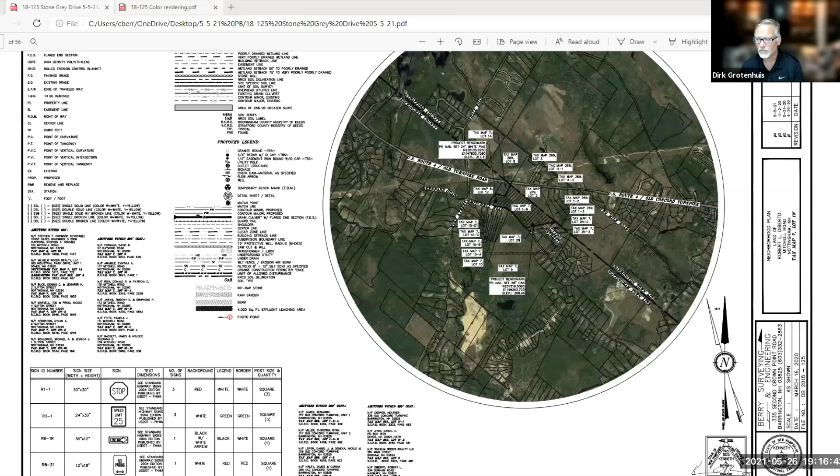Okay, great. Mr. Chair, members of the board, Christopher Berry with Berry Surveying and Engineering. Just a brief overview of the timeline of the project.

Last September, or a little bit prior to that, there was some discussion about needing a variance to cross through some jurisdictional wetland areas. That was ratified by the board, and we asked that our application be tabled until such time as we received a variance and came back. We're basically ready to come back to the board now. What we didn't want to do is continue to a frustrating no end until we were really ready to come back with a formal resubmission to you. So that process has taken place.

We have received the variance to cross through the two wetland areas that we previously had discussed with the board, approximately 6,000 square feet of disturbance. After we received those variances, we took some time to really evaluate a lot of the board's comments.

Since then, I think you can see in my narrative to the board, we've made quite a bit of change, primarily to the two entrances of the project and how that affects the rest of the site and the rest of the project. We also have some updates for the Division of Historical Resources and our archaeological consultants, who've been doing some work on the site as well. It took us a bit to make the changes we thought were necessary between the time we got the variance and our submission on May 5th.

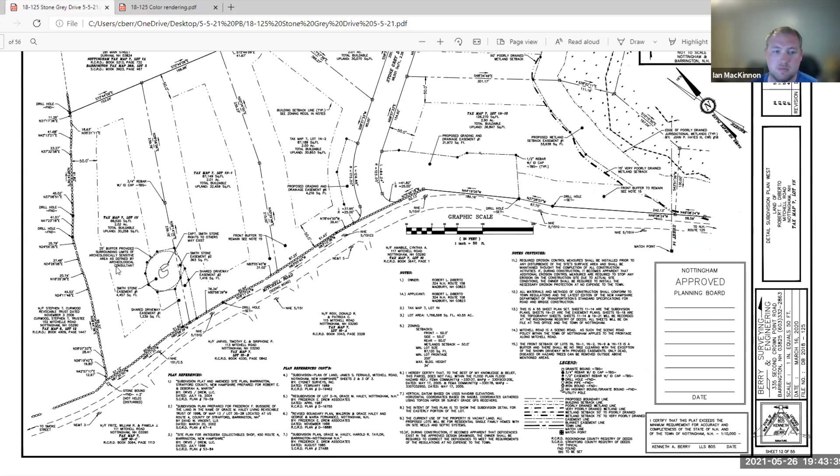The only question I had, I haven't found it in the plans yet in the notes—you mentioned there were some notes related to the monument cemetery easement. Are there restrictions on regrading within that easement? I see there's a proposed driveway close to it and a house close to it. Are there any limitations to regrading within it? I assume it needs to remain as is.

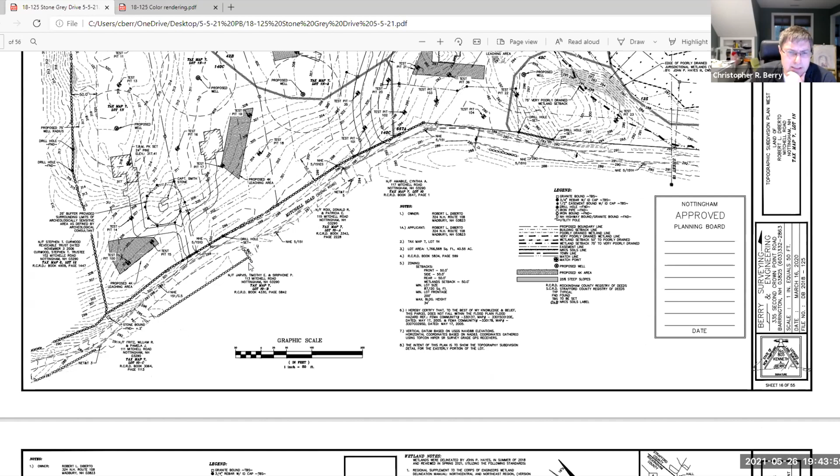Yeah, so there's no grading allowed within that easement. Okay, we do show a driveway that skirts right along the edge of that. And I believe somewhere in these plans, I required my staff to show me a profile of how that would be built.

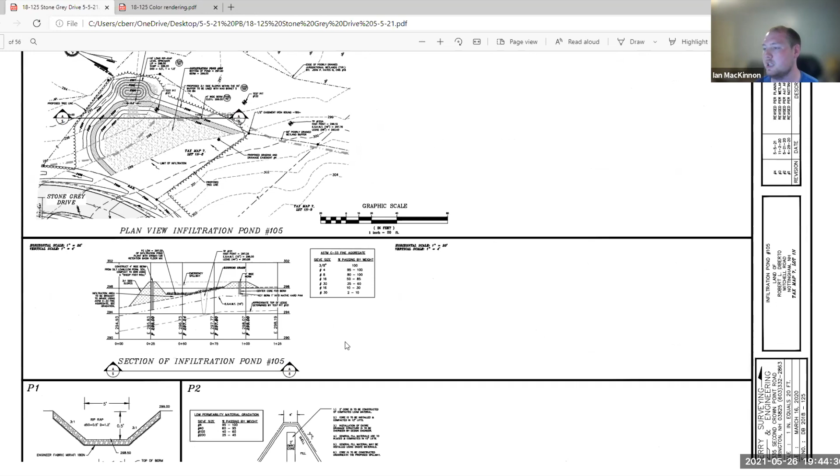Yeah, for this very conversation, you can see it here on this overview grading. I know one is provided as part of the sight distance plans, sheet 44. Yeah, I see there was a profile for that first common drive portion. If you go from there, it looks like they split off based on the contours. It looks like they should be able to avoid it, with some tweaks here and there.

They're probably not going to draw these too harsh. They'll be a little more sweeping as they're built on site, so they probably won't be so close to that easement line. But to answer your direct question, no disturbance allowed in that easement whatsoever.

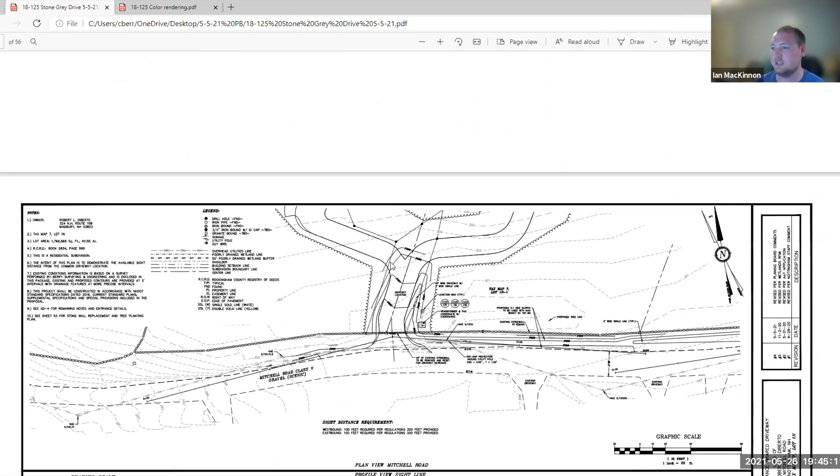Okay, good. Like I said, I think it's good. There's a noticeable improvement to the disturbance level related to the stormwater and stuff. I'm glad to see that some of the redesign helped you consolidate the ponds. Overall, it was a lot of good improvements.

Any other members with comments or questions? Yeah, it's Mr. Veal. Thank you, Mr. Berry, I think you summarized a very complex issue, a lot of detail, in a great way. I think it's clarified and alleviated a lot of our prior concerns. We appreciate you listening to the feedback we gave and incorporating it into this revised plan.

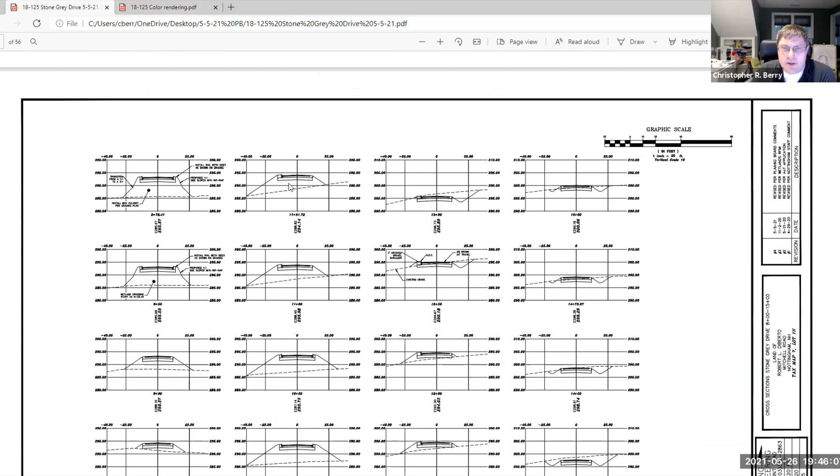One of the items I had before was proposed lot 19-13, and I think a few others had 25% and greater slopes. That amount that's not included in the lot envelope at all, correct? It is not. So all of the 30,000 square foot buildable area calculations do not include the 25% slopes or buffers.

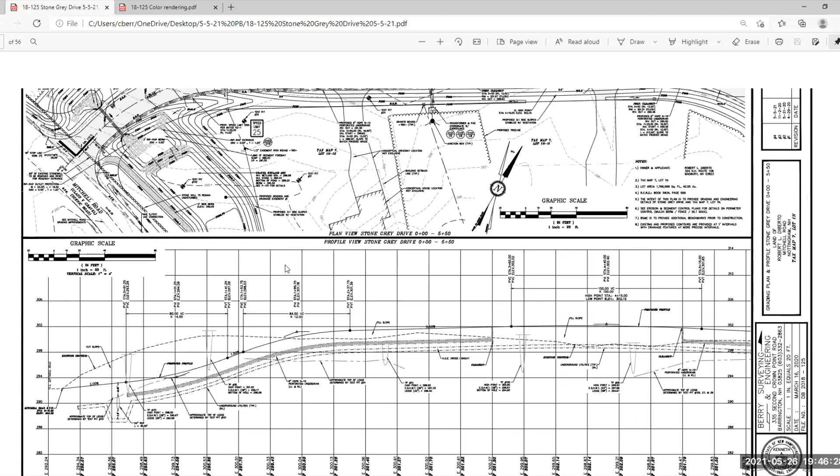Have you already gone to the Concom, being on a scenic road? That's usually one of the requirements, that you go to the Concom and they provide feedback to this board, which we either utilize or don't. Yes, we've been to the Conservation Commission on this project. Yeah, I thought so, but it's been a bit.

So, the 25-foot burial buffer, how's that? Is it delineated with any kind of visual, or is it just that you avoid it during construction? That's actually a really good point. We've geometrically determined the easement area around it and provided metes and bounds around that buffer, and we would place easement bounds with caps on them. But much like the wetland buffer we're proposing, some well-placed placards at eye height would probably be a good idea.

Okay, and there's no improvement of the burial area proposed, right? There's no fencing or anything like that being proposed, correct? There's not, no. It's not defined well enough for us to try and undertake that type of work.

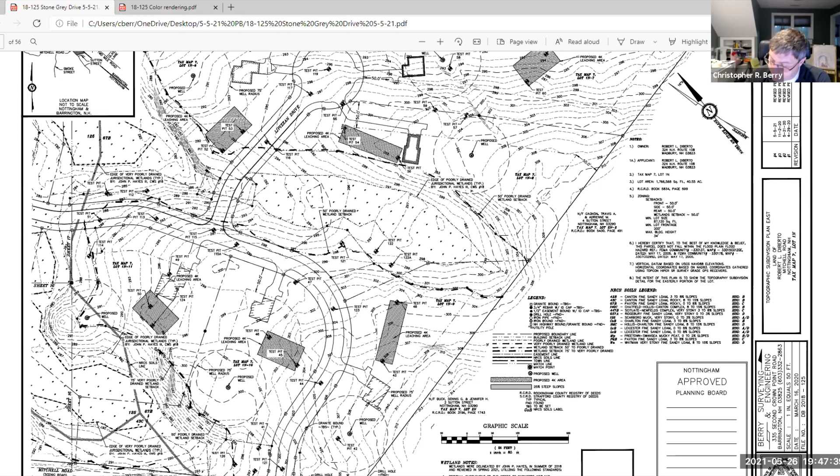I would encourage some kind of visual to help landowners and future landowners know where that is, at least for a period of time. I think that would be great. I like the idea of the wetlands buffer you mentioned. It's hard for a landowner to understand where those are, but with some kind of visual clues, that's going to be very helpful with maintaining that area and hopefully eliminating any impact to it.

The only other one I had, I guess this is more for the board, is with the grading, erosion, sediment control plan, there's one item in our subregs that says the board will not accept final calculations that have not been reviewed and approved by the town's engineer. I don't know if that's happened yet.

Well, we don't have a town engineer, and we did not have this out for consultant review. The original project was reviewed by CMA, the third-party engineer, and I think these plans have been sent to them. Joanna's nodding yes. Yes, they've been sent for review. I have not had any feedback from them yet. CMA, I can't believe I couldn't think of their name. CMA, yep, correct. Yeah, then that's valid.

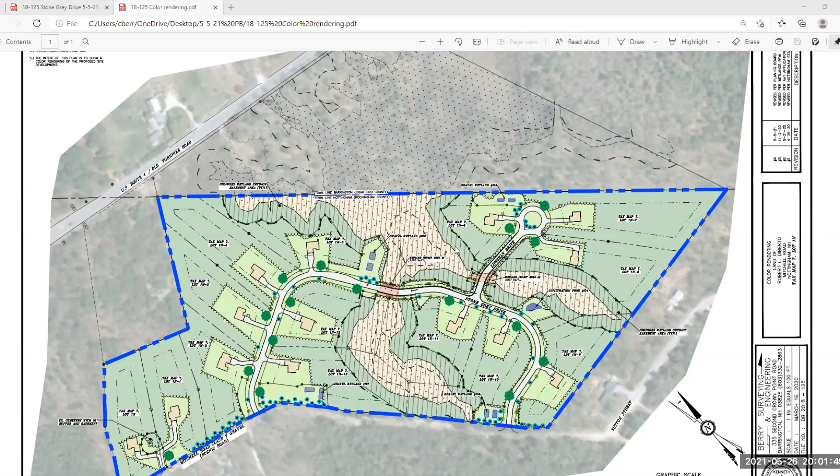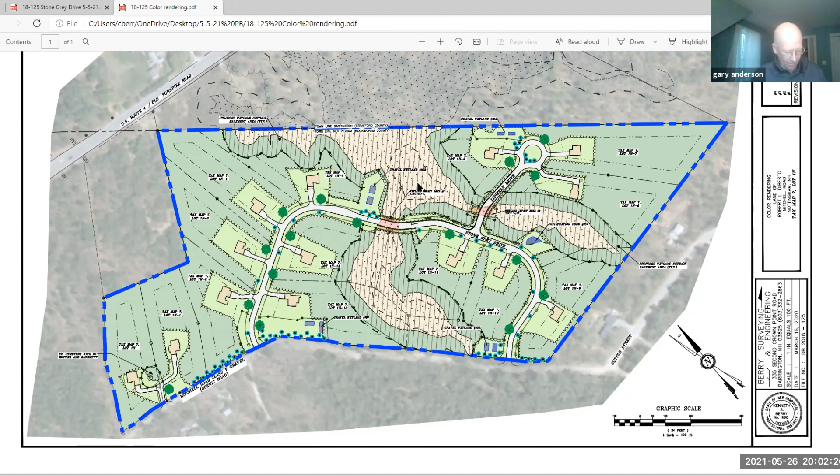Gary, you've been holding on very patiently. I have been, I just had one question. Mr. Berry, I know you've been working with the road agent on the subject of Mitchell Road. I thought I remembered that there would be grading changes in Mitchell Road, and I'm kind of not understanding the plan to see that. So my question really is how much disruption or change is actually planned to happen on Mitchell Road.

So from the entrance of Stone Grey Drive, we'll call that the northern entrance, this is really where there's a vertical face in the road cut. And so we're proposing that that be swaled, with an extension of a shoulder. So Mitchell Road would be widened by a foot or two.

And then there would be a 3-to-1 slope into a swale that's about 2 feet deep, and then a 3-to-1 back slope. That would be cut back up to the existing stone wall, and so that stone wall in that area would not be touched. Then we're proposing some landscaping, trees be planted on the back side of that stone wall.

Currently there's not a whole lot of vegetation there, and because we're taking down vegetation that's in the town's right of way, we wanted to enhance that area with some visual appeal and buffering in the future. The profile of Mitchell Road through this section, heading south from the same intersection, would be regraded and shaped, providing some cover over a proposed upgrade to an existing culvert under Mitchell Road. That area would have gravels added and the profile modified slightly.

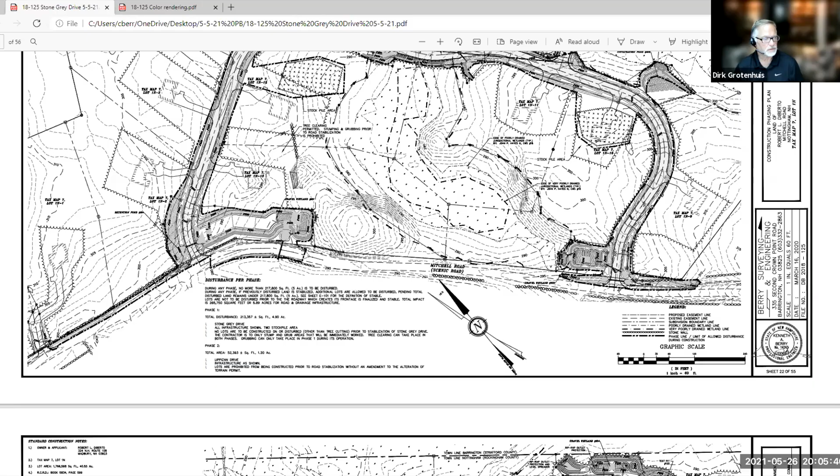Thanks, Gary. Any other board members have a question before I open it up to the public? Okay, let's go ahead and open it up to the public for any testimony. Seeing there's only a few, I will not take it in order of opposition or favor. So if anybody does have a comment, for or against this application, you can take yourself off mute and state your name, your address, and then your comment.

Anybody from the public have a comment? I have a question. Yes, go ahead. Is it Patricia? I believe your screen has frozen.

Is anybody else hearing her? No, but Patricia, if you can hear us, there's a number on the planning board page you can call in instead if your internet's having a problem. It's 301-715-8592. As I realize, if you have internet problems, you can't get to the website, so...

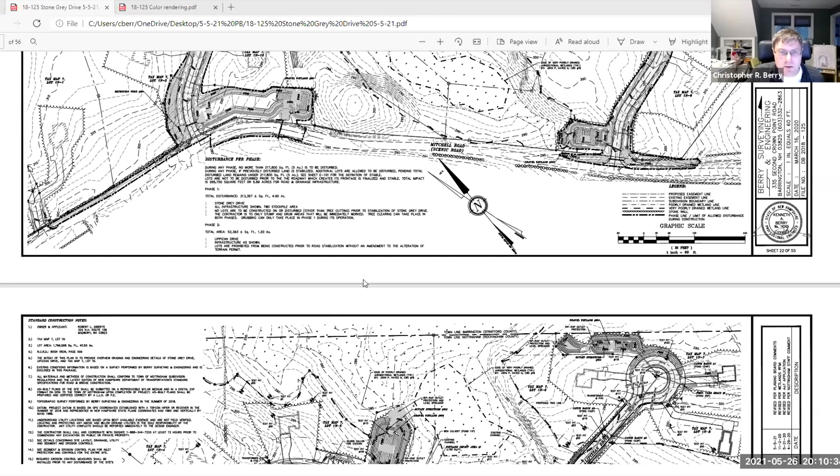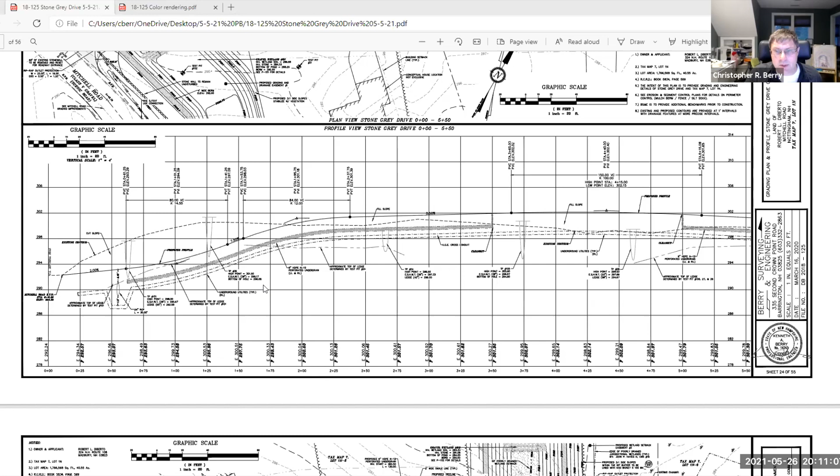Mr. Berry, could you comment about what you know about the soils there and whether there's blasting planned at the moment? There's no blasting planned at the moment. Let me just look at one profile real quick. At the entrance to Stone Grey, where it enters, there might need to be a little bit of hammering, since we are dropping that down a little bit. But as you can see, our test pits are shown here in the profile. This is the existing grade, and these are the test pits. There might need to be a little bit of hammering to get our gravels in, but no known blasting at the moment. We do have a blasting note so that if it is required in the future, they follow the fire department's rules and regulations for blasting. You would have to be notified as an abutter, and if you so chose, you would have your foundation and potentially your well monitored if blasting were to take place.

Okay, because that location is right across the street. Right, if they were going to widen the road on the corner as well. Yeah, that's what we're thinking, that the area you're taking down is potentially ledge. We've done test pits in that area, and I don't believe there's ledge. You're talking about the widening of Mitchell Road. I don't believe there's ledge in that area.

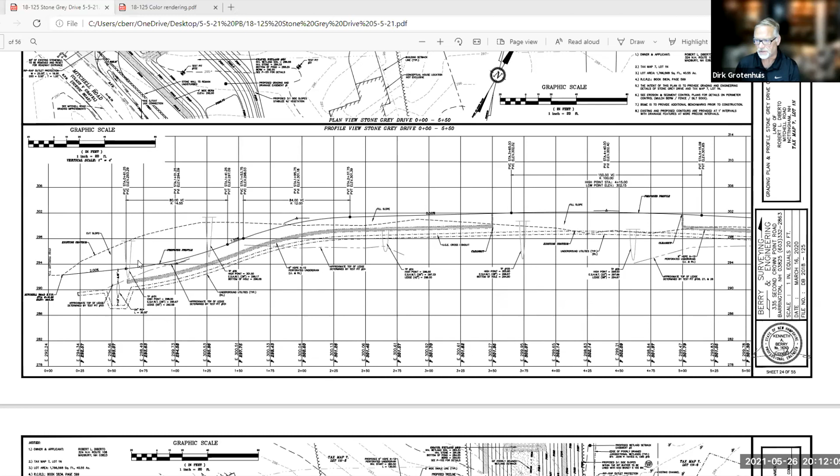Yeah, but as he indicated, if there is some blasting, there is a plan that would be put in place to protect you. Okay, good, because we're actually putting in a new foundation for an in-law apartment over the next few weeks. So I don't know about that, since it's new. But thank you, at least we'll be notified. So if we have to engage a blaster, they will need to notify the town and notify you as an abutter. There's a certain blast radius based on the blast, and at that time I believe you have the option of having them monitor your foundation and your well as part of that process, so that at any point they can see how it may affect you. But I don't believe there would be any blasting. Okay, and any effect would be taken up with the blaster's insurance company. Okay, thank you.

Okay, all right, does that satisfy your question? I think so. Yeah, okay, thank you. Oh, thank you, wait a minute, maybe one more quick question. How far down, you said you moved that first entrance, how many feet approximately, just so I can get a visual? How much further toward Sutton Street is that first entrance than it was originally?

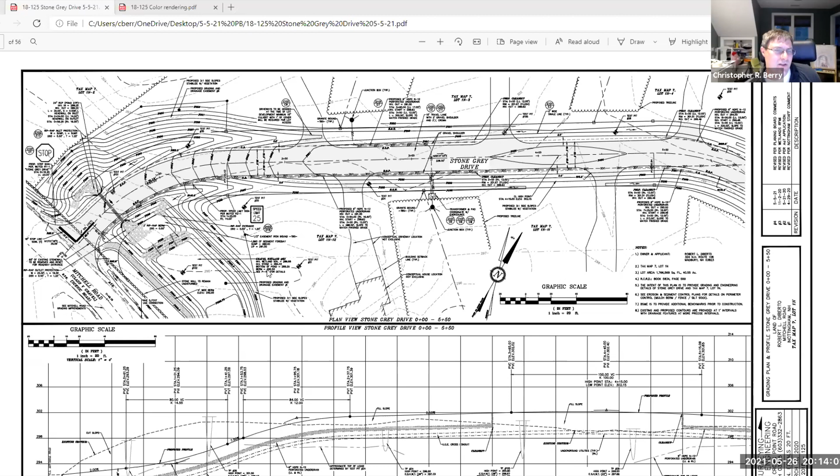I can't, it's so small. Well, I'm sorry, I'm thinking. I don't communicate well when I think. Just roughly, how many? If I had to guess off the cuff, 60 feet or so. Okay, all right.

I'll have to check the plan and get a more detailed estimate on that. Thanks for answering questions.

I also think it's important to note that the state permit, the AOT permit they get, requires some provisions around blasting too. So the state would actually have to be notified of that blasting, not just the town. Good point.

Unless there's any other public comment, I'll close the public hearing then. And now we need to act on the two waivers I mentioned.

If someone could make a motion. This is Buzz. I would like to know if we can act on the two waivers separately, because I'm still not in favor of the cul-de-sac, because it's going to be a public road. It's going to be a potential road into Barrington and another development, and I think it's going to be more of a burden on them and an asset for the developer. So I think we ought to look at the two waivers separately.

Yes, we can look at the two waivers separately. Mr. Chair, I'm prepared to make a motion if you want me to start that process. Sure, thank you. So I'll separate it out for you, Buzz.